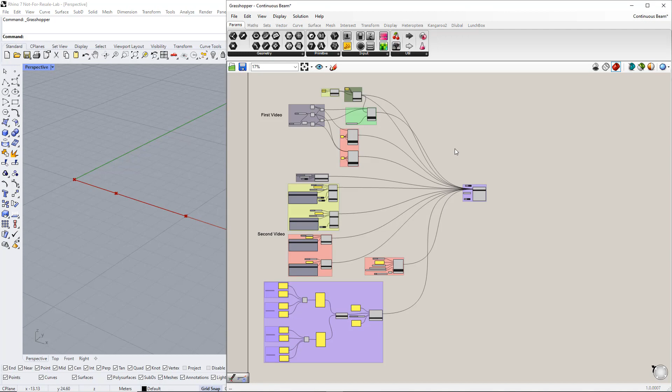Our first example will be about a continuous beam, and it will be divided into 2 videos. In the first video, we will create the geometry, members, cross-section and material, and assign supports. In the second video, we will create static analysis settings, load cases, design situations, and load combinations. Afterwards, we will apply the load on the members.

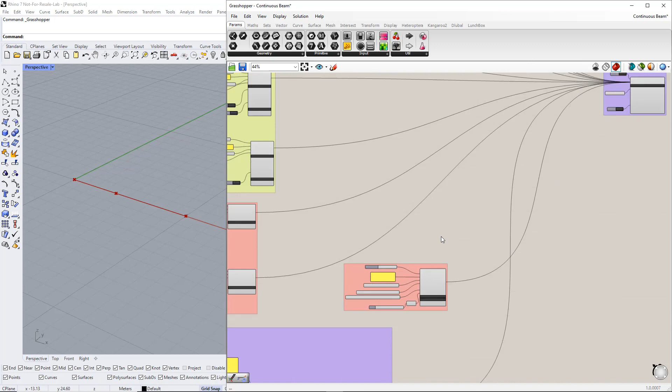In order to follow our online course, you need to install the Dlubal plugin for Rhino and Grasshopper. You can find it in the Dlubal folder under Tools. Double-click on the file to run the installation. After completion of the process, start Rhino, Grasshopper and RFEM.

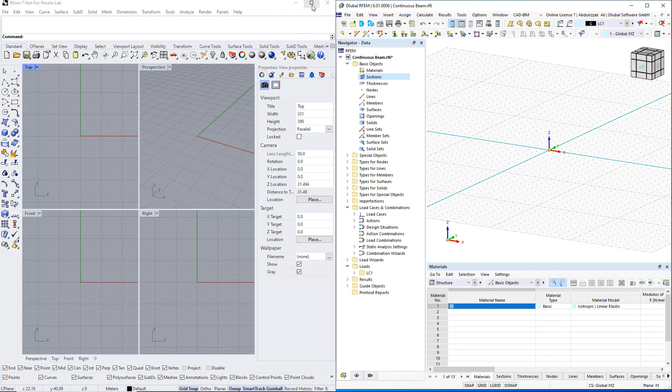First, we will show you some information about Rhino Grasshopper. When we start Rhino, we have 4 default viewports: top, front, right, and perspective view. To rotate the perspective view, hold down the right mouse button. You can zoom in or out by scrolling. You can pan by holding down the mouse wheel.

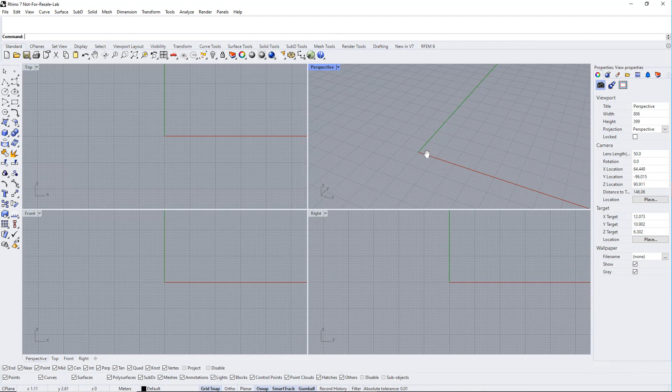For other views, you can pan by holding down the right mouse button. To minimize or maximize a viewport, you can double-click on the Name tab. You can also change the viewport from the Viewport tab here. You can change the display mode of a viewport as well as many other settings by clicking the Name tab, as you can see.

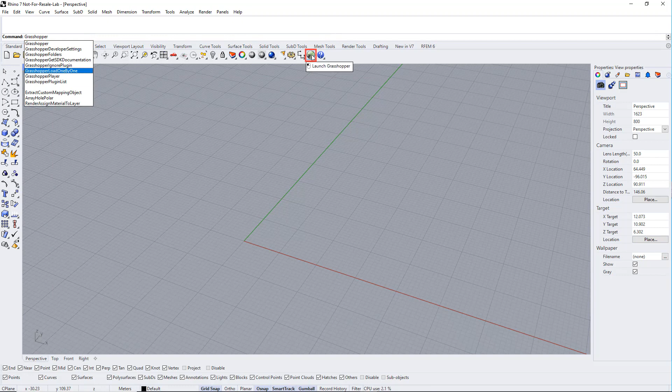To launch Grasshopper, type Grasshopper into the Rhino command line or use the command Launch Grasshopper in the Standard tab in Rhino. The Grasshopper window will appear on the Rhino viewports. You can divide the screen into 2 parts by holding the Windows key and pressing the left or right arrow key. We will display more information and features during the course.

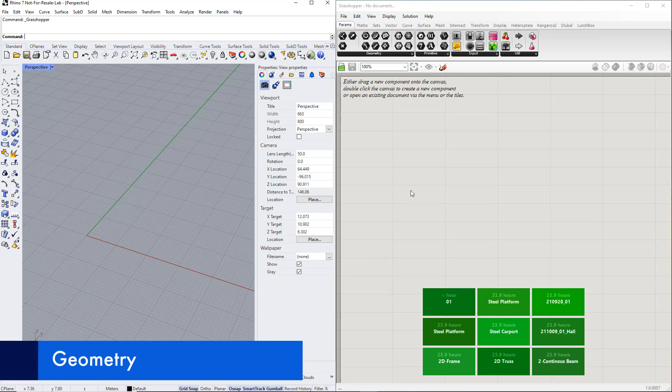Now, we will begin with the geometry. First, we will create a point using the Construct Point component. You can find this component in the Vector tab. Then drag and drop it from the Vector tab onto the canvas. You can also create a construct point by double-clicking the canvas and writing Construct Point.

By default, the coordinates of the first point are 0, 0, 0. You can read any information in a component using the command panel, which can be found in the Params tab, as you can see. Afterwards, we will copy it twice using Ctrl+C and Ctrl+V or by holding the Alt key and dragging the component.

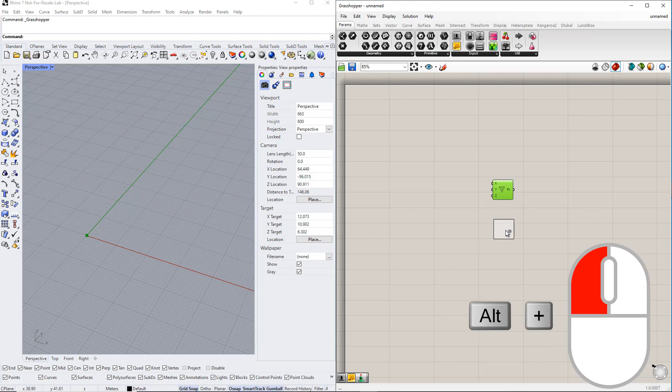For the second point, we will assign a number slider to the x-coordinate, so that it can be easily adjusted later with the slider. You can find it in the Params tab using drag and drop or by double-clicking the canvas and writing number slider, as you can see.

For example, we will create a range by double-clicking the slider. The lower limit is 1 and the upper limit is 10. You can also enter the slider name. To do this, we enter first span, or set the rounding by selecting any type you want.

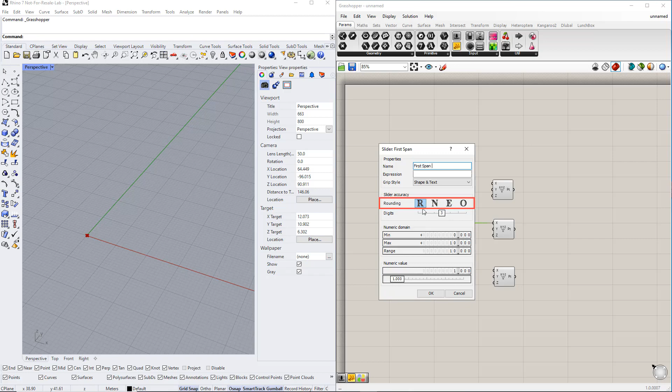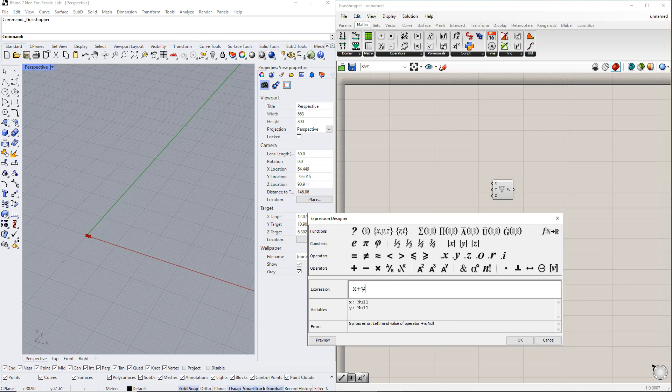For the third point, we will insert the expression component to define a parametric equation between the first and second spans. You can find this component in the Maths tab under Script. Double-click the expression component to open the Expression Designer and change the expression to x plus y, where x is the first span length and y is the second span length.

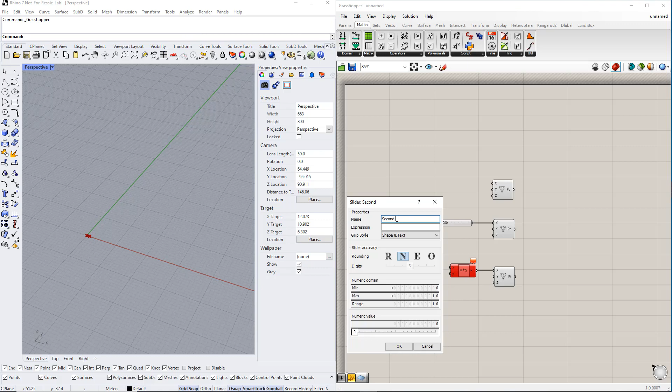You can create a range for y, either with a number slider command or by double-clicking the canvas and writing the lower limit, 0, then, less than, and the upper limit. We enter 10 for the upper limit. You can click the plus sign to add an input or the minus sign to remove an input. Now, we connect X and Y to the expression component.

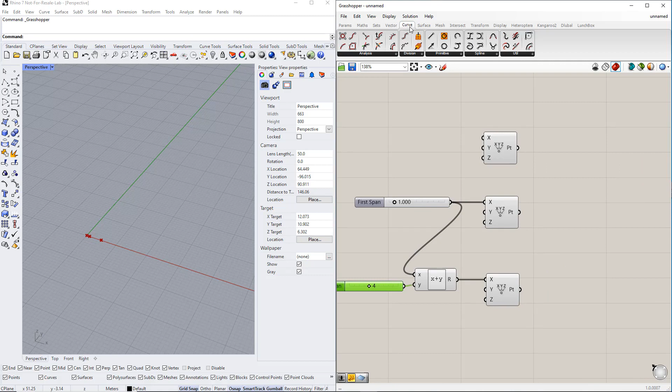In the next step, we will create lines between these points using the line component in the Curve tab. We use drag and drop, or we double-click on the canvas, write line, and select the respective line. In our example, we select the line which has a start and an end, as you can see. Afterwards, we connect the start and end points of each line to the line component.

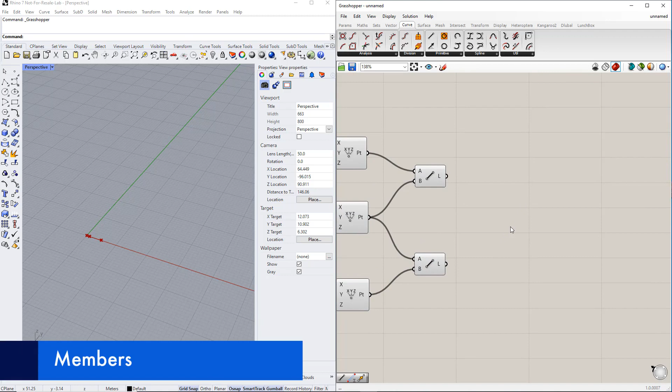To create a member for RFEM, we insert the Dlubal component titled Member. You can find it in the Dlubal tab. Here, we can also define the member type using the ValueList command with drag and drop, which is also in the Params tab. We can also double-click the canvas and write ValueList. For this example, we select the beam type.

Now, we connect the line components to the Grasshopper line in the member component. By default, a new connection will erase existing connections. Hold down the Shift key while dragging the connection wires to define multiple sources. The cursor will turn green to indicate the addition behavior. You can disconnect wires by holding down Ctrl and dragging, or by right-clicking the connection and selecting Disconnect. As you can see, when we hover over an item, the wire will be highlighted in red.

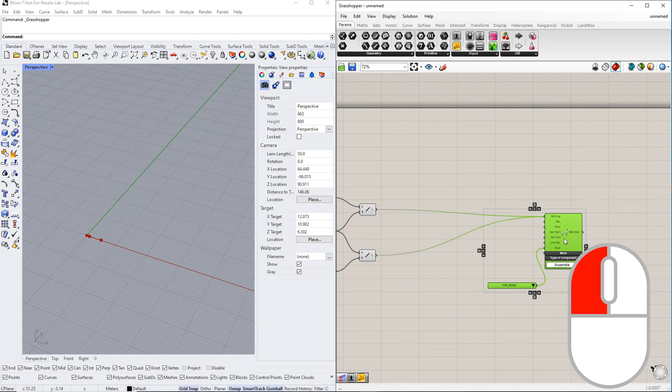Next, we will define a cross-section as well as material. For that, we will insert the Dlubal components, section, and material. You can also find them in the Dlubal tab. To enter the properties of the section and material, we use the panel command.

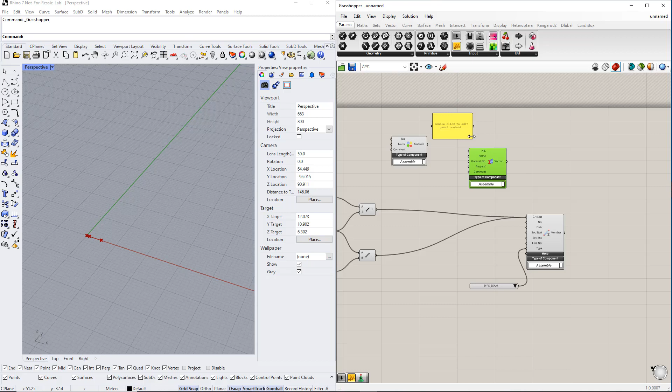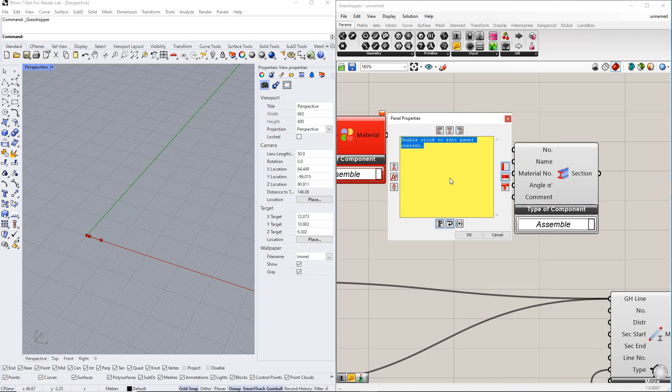Now we enter the numbers and names. For cross-section, we enter 1 as the section number and IPE 300 as the cross-section name. For material, we enter 1 as the material number and S235 as the material name. Make sure that you use the correct RFEM terminology. Only then is it possible to export the elements correctly to RFEM.

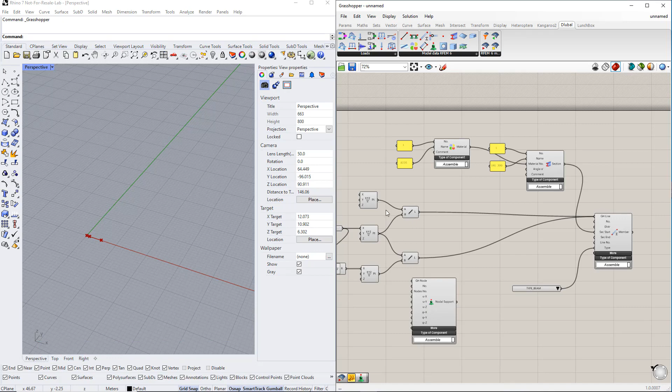Afterwards, we connect the material component to the material number in the section component and connect the section component to the section start in the member component. In the next step, we want to define the supports. To do this, we insert the nodal support component, which is in the Dlubal tab. For the first node, we want to assign a hinge support. This can be defined by using the panel command.

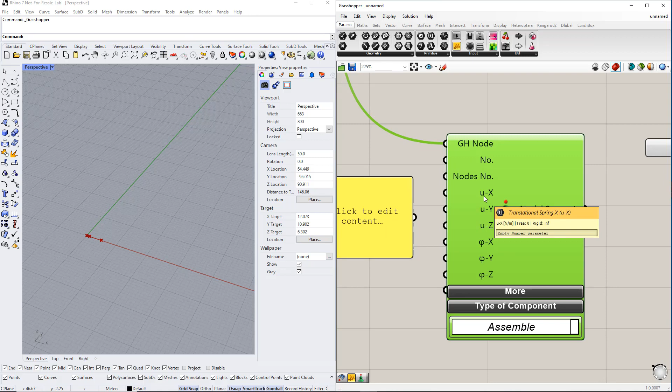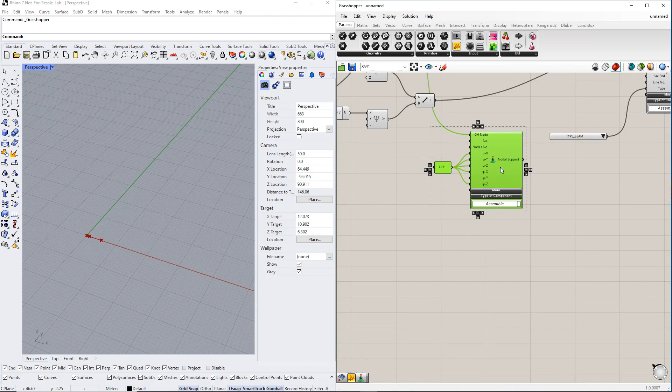As you can see, 0 means free, infinity, INF, means rigid, and every specific number in between means spring. Then, we connect this panel to the respective support conditions. We repeat the same procedure for the second and third supports, but with other conditions, because we want to define sliding supports.

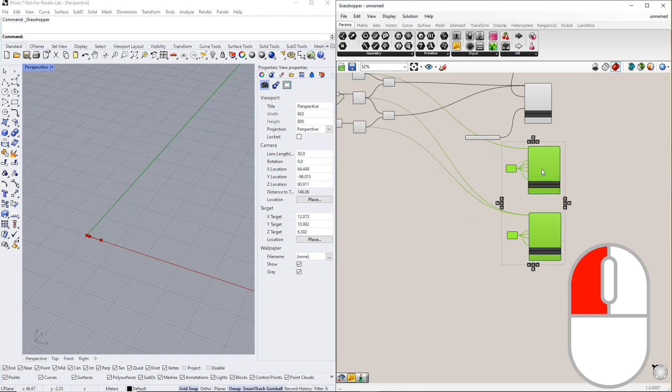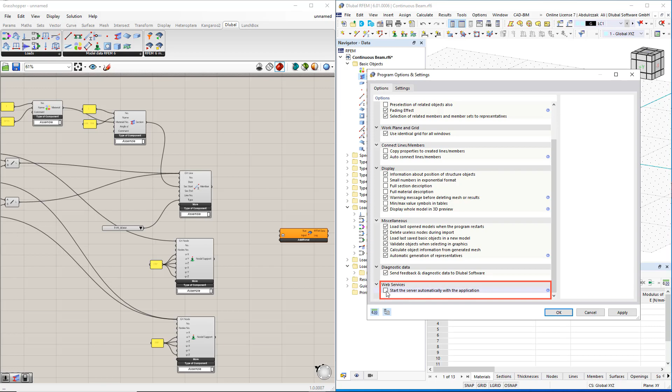To transfer this model data to RFEM, we have to insert the Dlubal component, RFEM 6 export component. We also have to activate Web Services, which is in the Options tab, in RFEM 6. Start the server automatically with the application. To start the export, we use either the button or the Boolean toggle command in the Params tab. For this example, we want to use the Boolean toggle command.

We can also select units using the value list command. For this example, we select meters. In addition, we can overwrite the previous data in RFEM using the Boolean toggle command. That means all data in RFEM will be deleted before the export, once we switch to true.

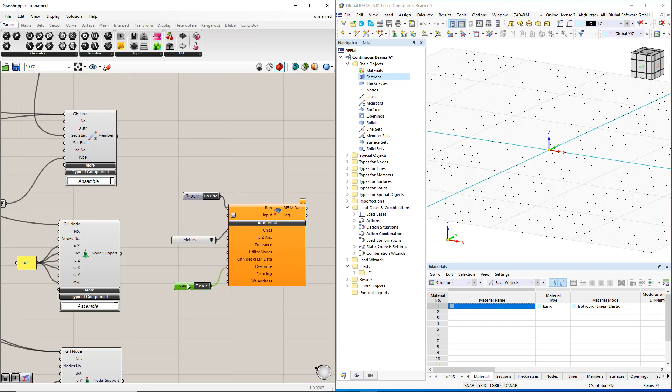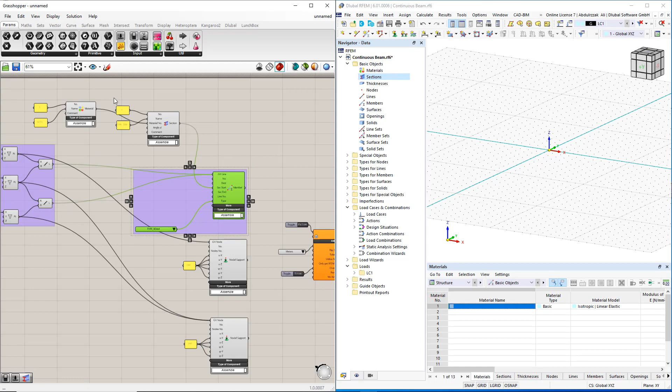To make the work easier, we will make groups, for example, a group for geometry, member, and so on. We can create a group by typing Ctrl+G with the desired component selected. To edit the name and appearance of the group, we right-click anywhere on the group. Here, we can enter the name of these groups, for example, geometry, supports, etc.

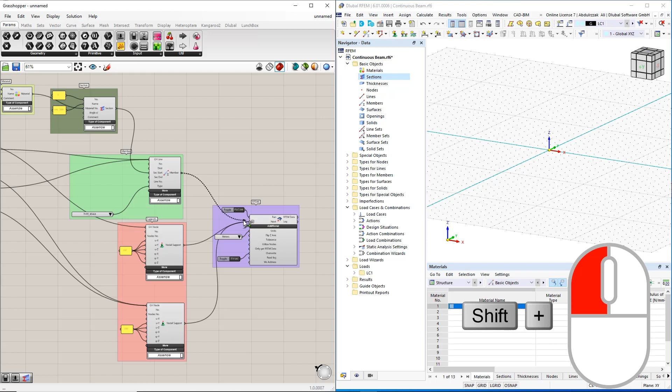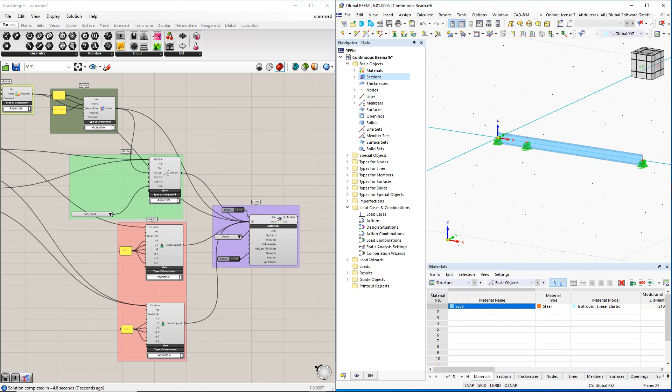We can also change many options, such as outline type, add to group, remove from group, or change group color, as you can see. After connecting all the components to the RFEM 6 component, we double-click the Boolean toggle command to perform the export. All changes to the parameters in Grasshopper now have a direct impact on the RFEM model.

In the next video, we will learn how to create static analysis settings, load cases, design situations, and load combinations, and apply the load on members.